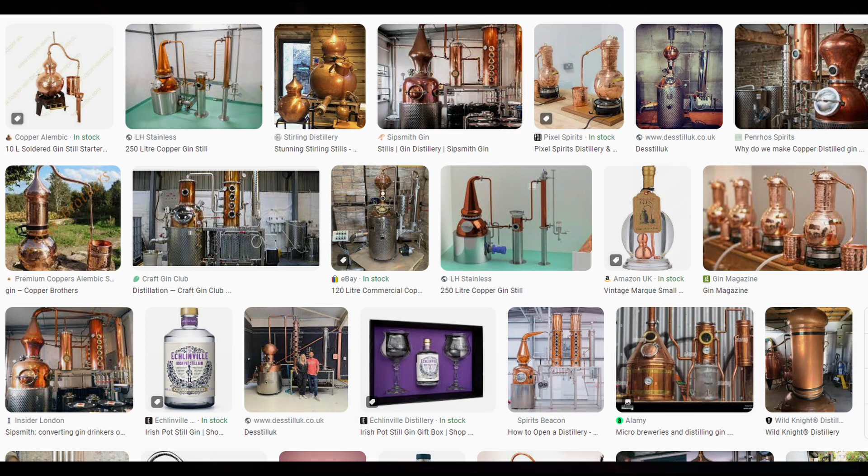So the starting point for me is an online search to find something that is a really nice shape and something that I think I can make on the machine. The critical factor here is the size of what you can fit into the rotary axis. Based on some mistakes I've made earlier, where I've made pieces that are too big, I'm going to stick to a 250mm, roughly 10-inch diameter for this.

So this is quite a short, dumpy kind of shape. I want to hopefully try and go for an 18-inch high, 450mm high lamp base here. We'll see how we go with the shape. We may need to elongate it a little bit, but the first step for me now, once I've got the image and decided that this is what I want to make...

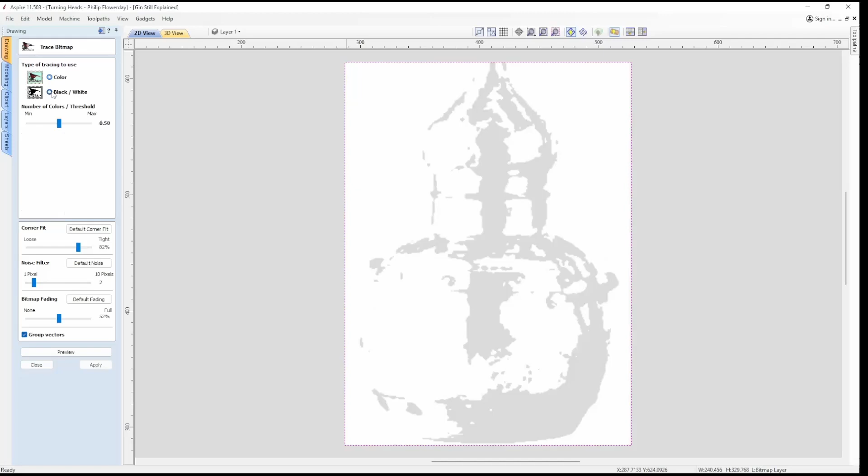is to trace a vector around the outside of the image. Now Aspire has some tools for tracing around bitmap images, and I'll show you there's an option to pick colours, and it's very good, but I don't want to do this. I just want an outline of this image that I'm going to wrap around an axis and produce a rotary job for the CNC machine to cut.

So I'm not going to go straight from Aspire to Mach 4 and the machine. What I want to do here is see what the most efficient use of the material is. I'm going to be using 18mm birch ply for this, and I don't think I need to have pieces that are 18 inches high all the way across here. I think it'd be very wasteful.

The other thing I want to try and do with this piece is to have 4 faces on it. You'll see on the oval lamp base video that there are 4 faces, and the way to do that is to have cross pieces. So you're layering up on 4 sides all at the same time, building from the center outwards. I can't think of any way of doing that in Aspire, so I'm going to use Blender.

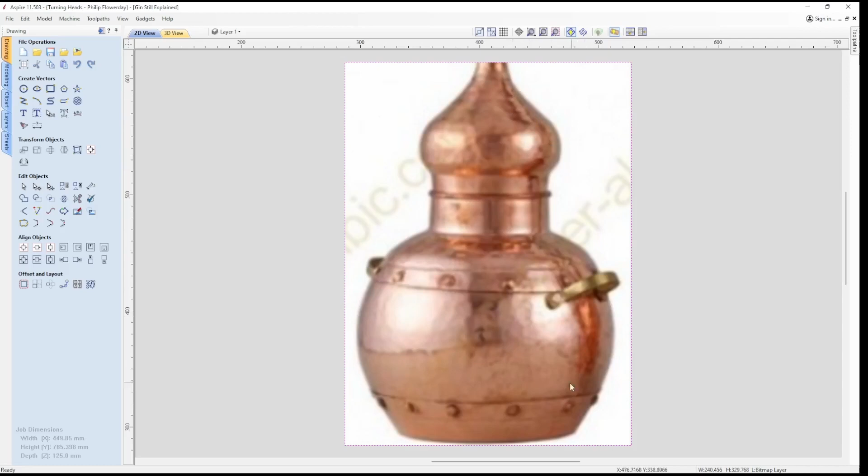So this is a vector I've traced round the bitmap image. Very easy to do with a combination of straight lines, circles which you can cut using node editing, and the curve tool. So it's interesting to do this.

You also have to bear in mind perspective, because this is not a head-on photograph of the still. So I'm taking a horizontal line from the base here in this corner and extrapolating that across. So this is all I need for a rotary job and a spar to be able to wrap this between the rails on each side. So I'll show you that on the job.

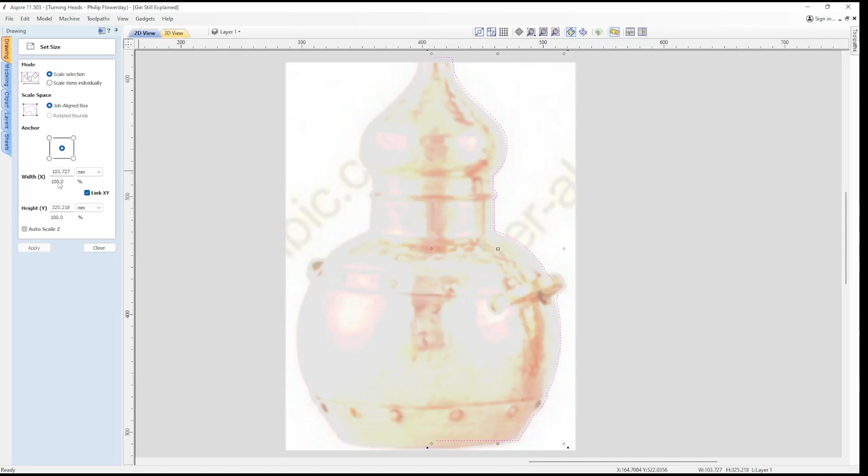What I'm aiming for here, as I said, is a 250mm diameter. So I'm going to try and manipulate this vector so that it's 125mm across as a radius. So I can go into my sizing tool and we can see here that it's 103mm, so I just need to make that 125, and then we'll see where we are height wise. So we're getting close to the 450 that I want, so we'll maybe be able to stretch that a little bit and it'll not take away from the shape.

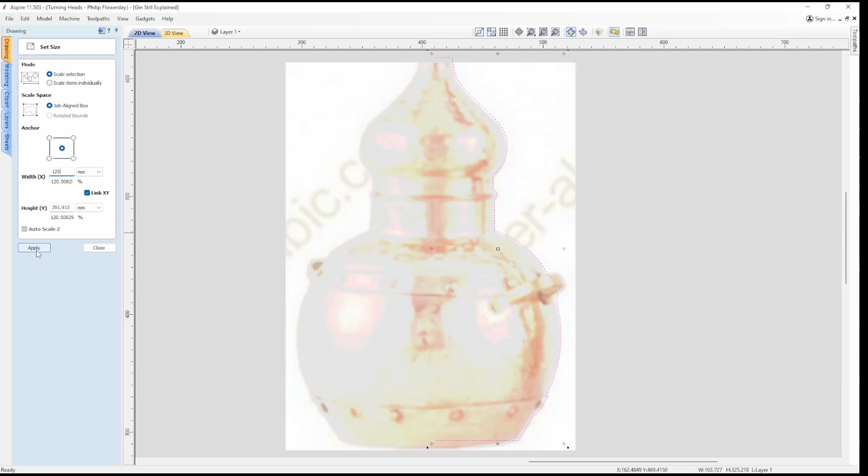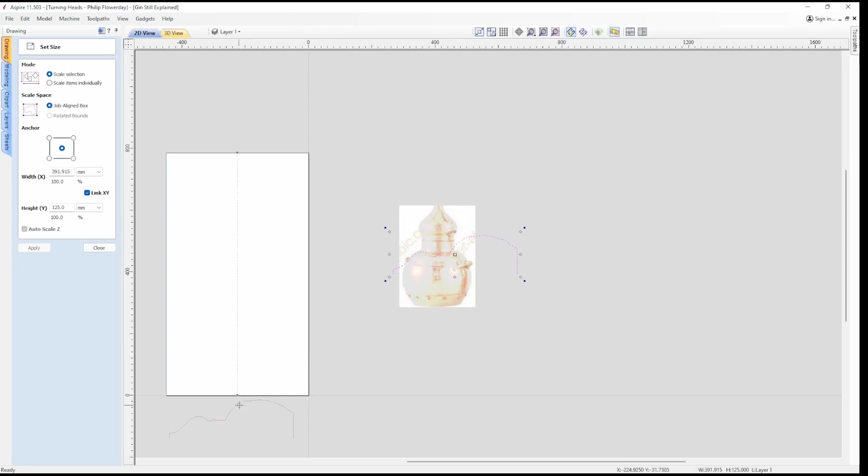So this is now a vector which I will use for wrapping. So I'll just rotate that around, and then bring that into my job. I'll just, for simplicity, it's easier just to have it here below the workpiece. This is my workpiece.

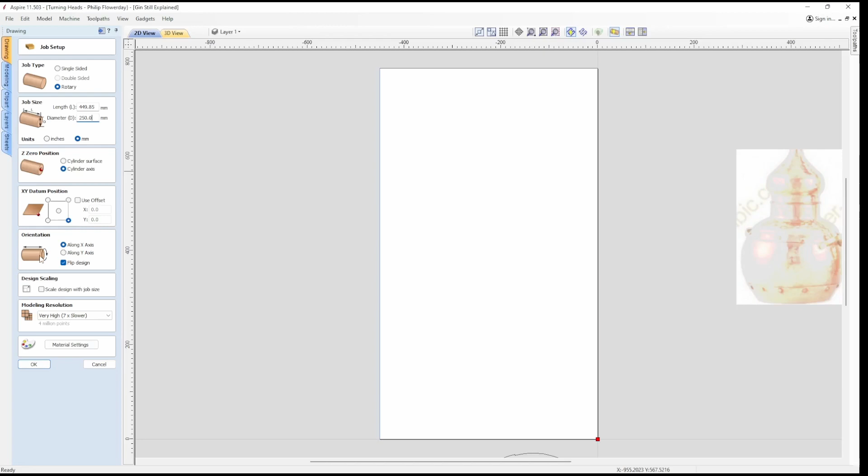And just to show you the job settings, we have a rotary job. We're going for a piece of stock which is 450mm long and this 250mm diameter. My 0 position is the axis for rotary jobs, and my rotary axis is positioned at the back of my machine, so I work from the right hand side to left, and I'm going along the x-axis. So we'll just OK that.

So this is my vector, and I'm going to make that 450mm long. So I want to disconnect the XY and just make that 450, because I don't want that 125 to get any bigger.

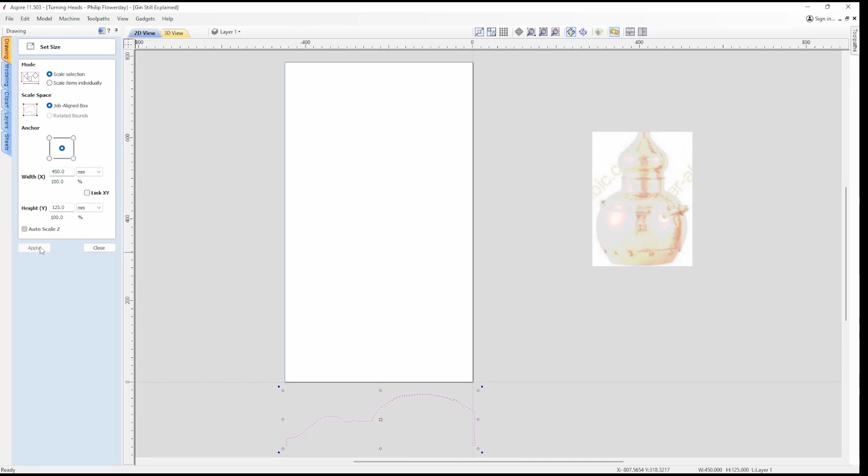So we've now got our final vector that we're going to use for our rotary job. So all I need to do is select these rails that Aspire creates automatically for you on a rotary job, and go into our sweep tool, use those selected rails, then pick the vector and apply that.

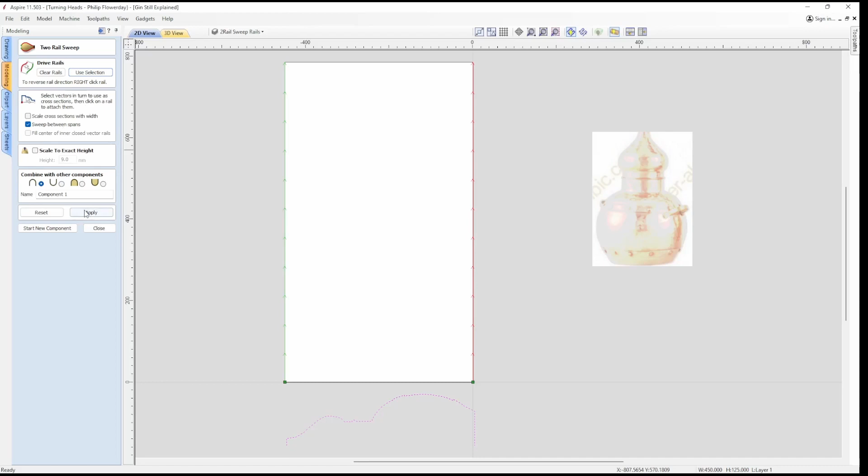So we'll go into 3D view and have a look at this. Okay, that's pretty good. So it's starting to take shape. That's exactly what I want.

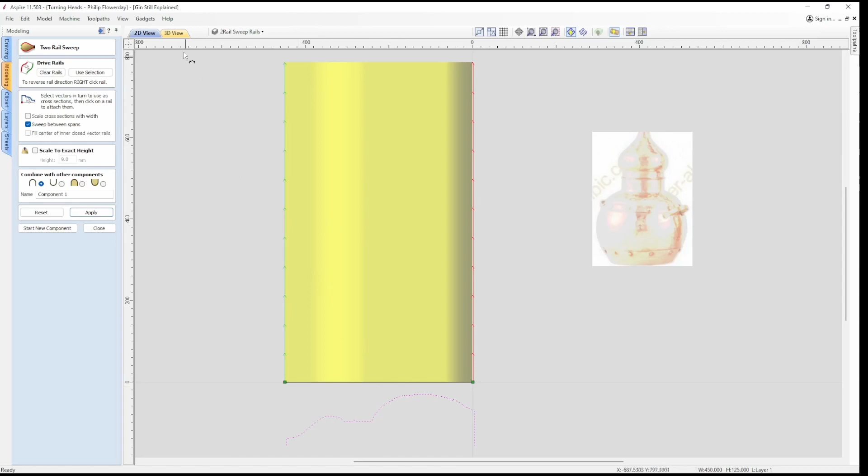So what am I going to do next? I'm going to create the studs that go around these straps, and then I'm going to put on some hammer finish. Now I think I'll just concentrate on this area. So I'll do that off camera and then come back when I've done those models.

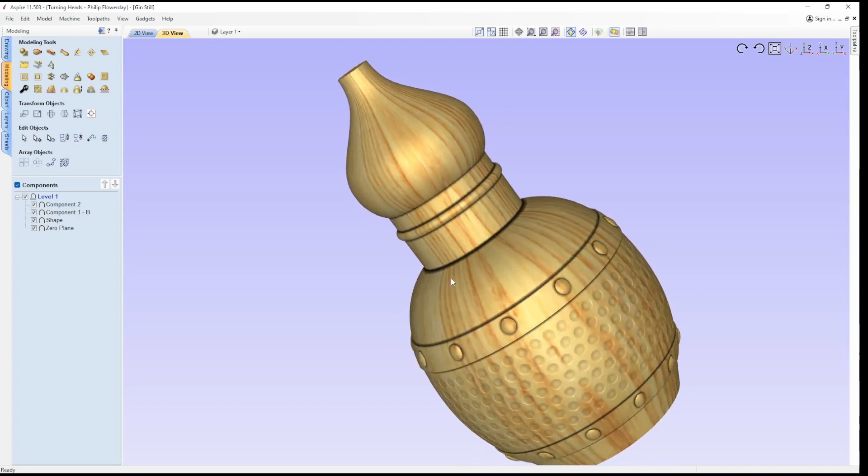So this is what it looks like now with the studs on the straps and the hammer finish. So I don't think I want to add anything more to this. It's just going to overcomplicate it.

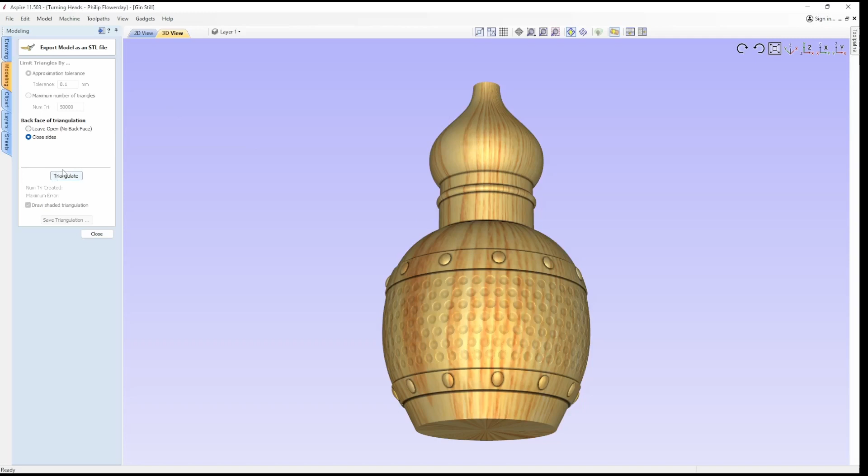Now we have our 3D model ready to export from Aspire, so that we can open it up in Blender and do our slicing. So I'm just going to very quickly do an STL export, and save that.

And the next step is we'll open it up in Blender.

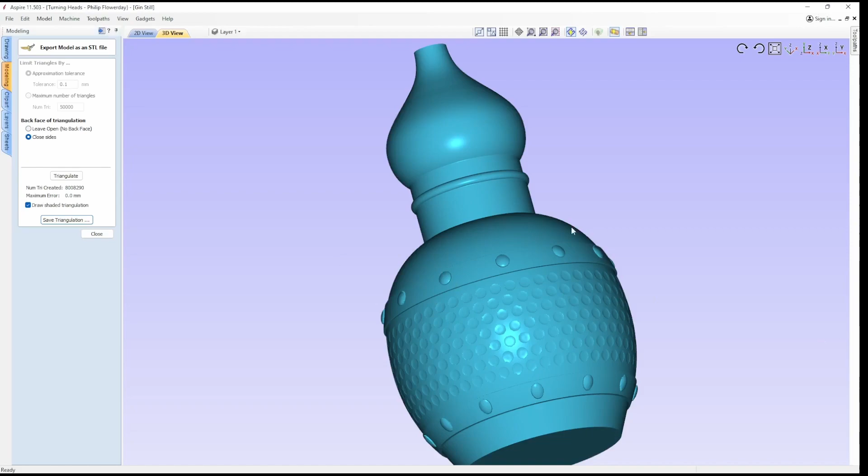Okay, so after importing it into Blender, I want to create my slices. So I'll create cubes which are 18 millimeters wide. Now the units in Blender are in meters, and I don't change them because I don't need to, as this allows me to bring this into Blender and back into Aspire again, and it keeps the units in millimeters in Aspire. So I create all these cubes which are layers of plywood and build them out from the center, and then I use a modifier in Blender to convert those cubes into the slices where there's an intersection of the gin still and the sheet.

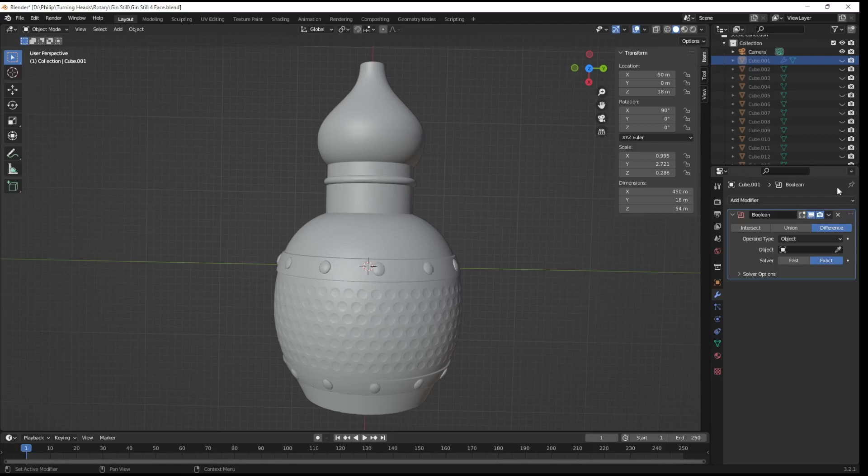So it probably sounds overcomplicated, but when you do it, it's not. So I'll just go in here and do a boolean and an intersect, and I've gone ahead and done this so just to keep this video as short as possible. So I'm just going to unhide all of these cubes that I've created, and you'll be able to see, hopefully, and maybe if I rotate this a little bit, you'll be able to see all of these slices that have been created.

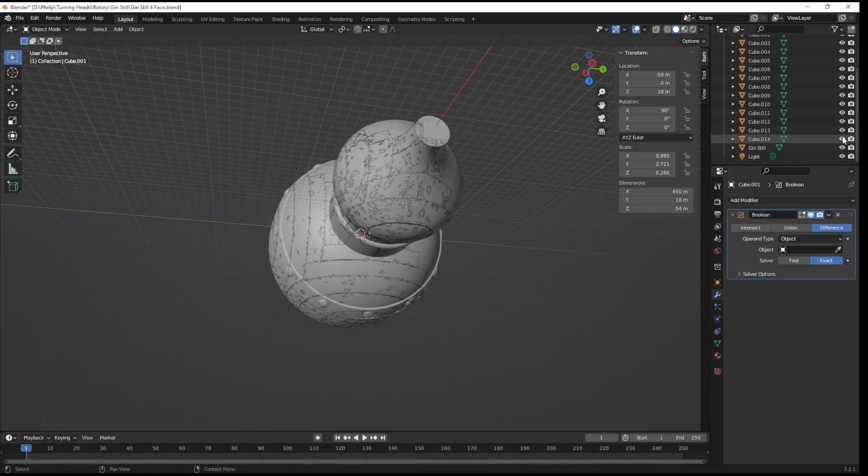I will ultimately hide and delete the gin still, but now we can see these slices, and I get a face here and a face here. I don't need to go all the way around because I'm just going to duplicate each of these slices when I go back into Aspire.

So what I'll do now, in order to get this ready to go back into Aspire, I will line all of these up on the same plane so that they will be on a sheet in Aspire, all in the same plane, which will be a sheet of 18mm ply in Aspire. So we'll show you that next.

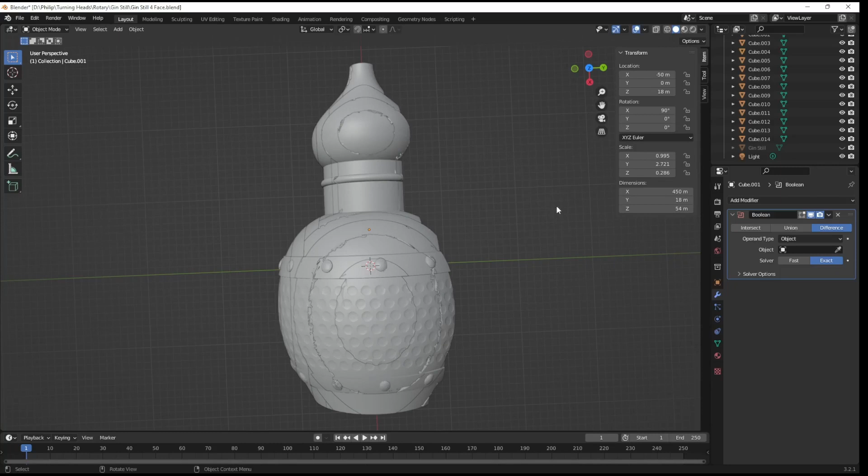Here's all my slices. Now what I can do is just take a cutting list from the dimensions of each of these pieces in Blender, take that out to the workshop, go and search for some of the pieces that may be offcuts from other projects, and cut the rest.

So I'll always just leave some tolerance just to give me a margin of error on each of these pieces. But you can see that I don't need a whole bunch of 450mm by 250mm pieces, which you would do if you hadn't used Blender, and that would be such a waste.

So this gives me the opportunity to use some of the pieces that are offcuts, and it speeds the job up as well, because I don't need to run a rounding path for the whole length of the piece, and I can just go straight in with roughing of the 3D model in Mach 4.

So we can stop here and create a cutting list and start laying the pieces out. So the difficulty is making sure that you've got all the pieces in the right order, and you know which piece is for a front and back and which piece is for a side.

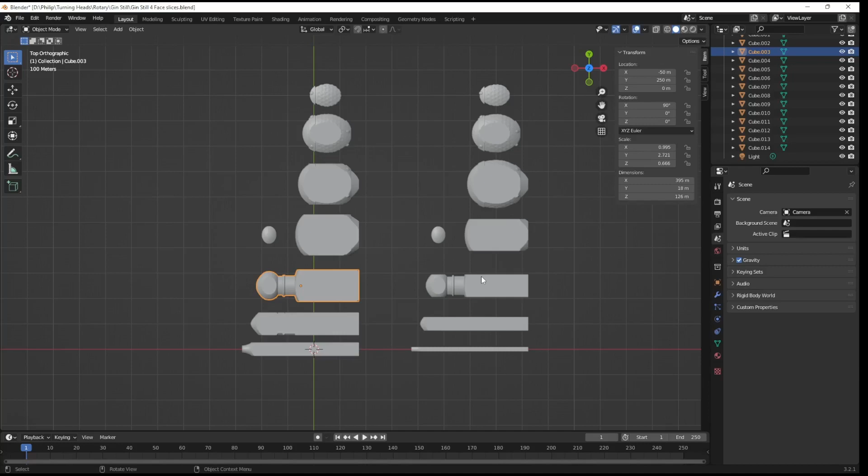I have brought this into Aspire to give me a cutting list, but you don't really need to. So next step, cutting the pieces out and doing a glue up.

Having cut all the pieces out, this is where it can get complicated. I lay them out on the table and keep all of the north-south separate from the east-west facing pieces. Label them all separately, starting with the innermost pieces working outwards.

So it turns out that even though I measured all of this out, and I know I can fit 250mm into my rotary axis, and I measured everything on Aspire and Blender to fit within 250 mils, the sides are all 250 mils, but obviously, stupid me, the diagonals are going to be more than 250 mils.

So to fix this, I'm going to cut two 250 mil circles on the CNC, put one at the bottom, one on the top, and whatever doesn't fit into that cylinder is going to get cut off on the bandsaw. So let's do it.

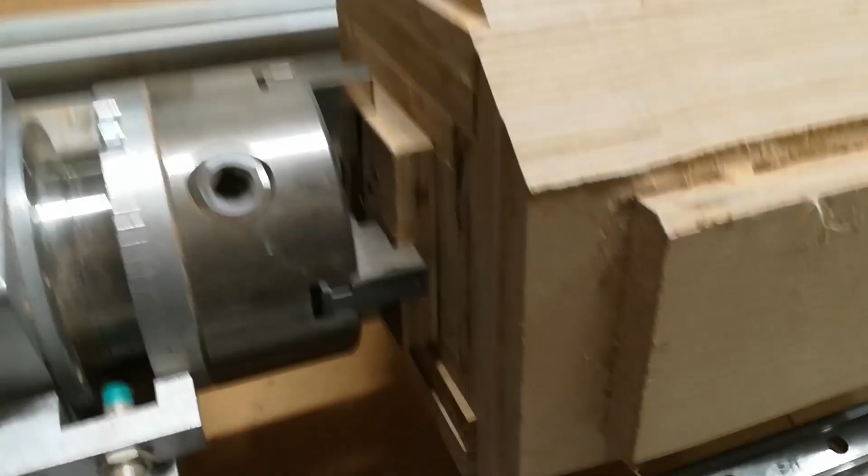Okay, so job for the bandsaw. That's it, cut on the bandsaw, and just doing a test here just to make sure that it fits and that it rotates freely. So with the machine switched off, I can just rotate this by hand, and it seems to be okay.

We're clearing the sides fine. So I'll go ahead and do a quick rounding path on it before I start the rough cut and then the finish.

So relieved to have that cut and fitting in now. Will not make that mistake again. Good to have the bandsaw to be able to get that cut down. So let's go.

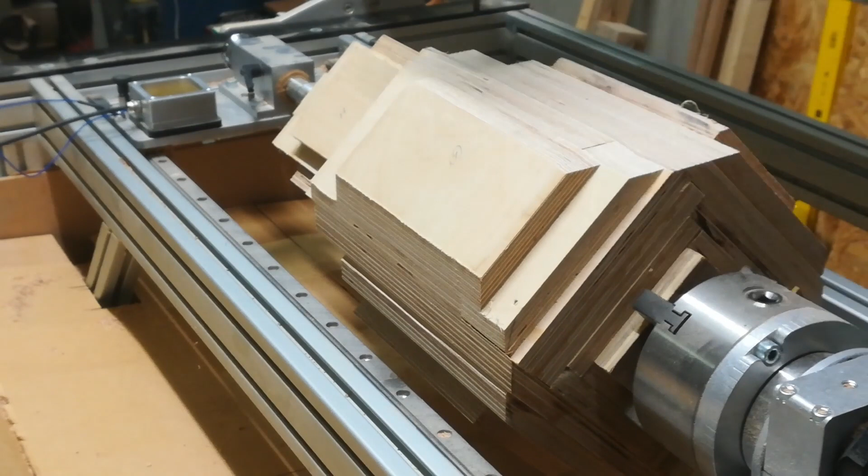So as you saw there, that toolpath is a little bit aggressive and the bit started to wander. So I'm going to up the RPM and slow the feed rate down and give it another go.

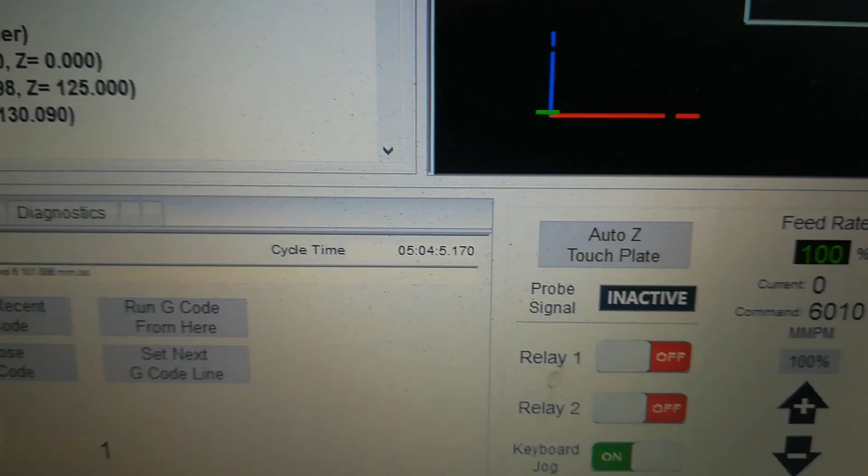Okay, that's the roughing pass done eventually. So we're looking at, if I can focus that, 5 hours on the clock. So it's really good to get that done.

So what are we left with? Well, you could say this is the Minecraft version. So it does look a bit blocky at this stage.

Now there are a couple of things just to point out here. I put an arrow on the bottom here so that I would know where my A0 was on the rotary axis. So as time progressed with the first few cuts, I noticed that this was going out of step. Now I don't think there's any issue in the machine. I just don't think that's the case. I think it's just because it's birch plywood that it's so hard that it's actually dragging the piece in with the bit, so it's incrementally, and you wouldn't notice it on each pass, incrementally building up a slight discrepancy in the angle.

So it meant that whenever I stopped and restarted a couple of times and reset the A to 0, then it was cutting at a slightly different position than it was before, which wouldn't matter for pure cylindrical parts of the lamp base, but for where I'm trying to put details in, there are some issues potentially ahead with the finish pass. So I think these are supposed to all line up with each other, and you can tell because of the lines on the birch that it's not quite lining up. So I think we might have some issues here.

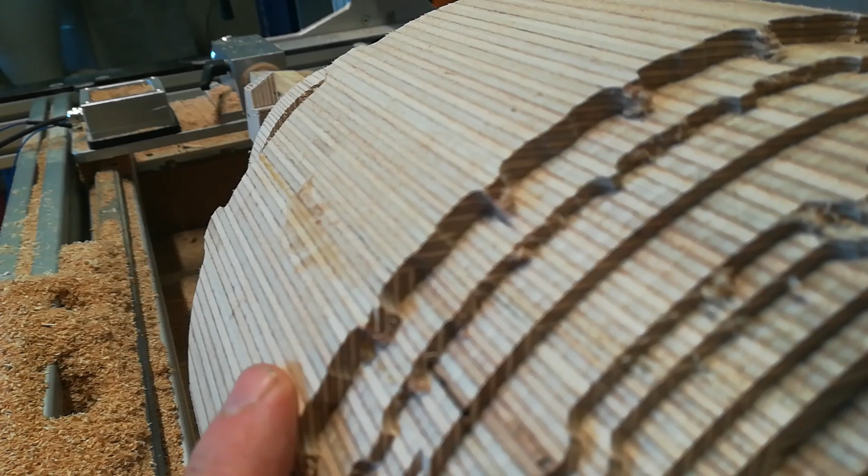So other than that, and you saw that every so often I had to cut a little bit off here, otherwise the collet would have hit the side. Don't really want that to happen, so that just required a little bit of management. But I was watching this like a hawk for the last hour, just to make sure that this all ran smoothly.

That's actually hollow in the middle in there, so I need to put a plug in once this is cut, because the plug is at the end there. But whenever I was cutting these, I left them about 100-120 mil longer than they needed to be, just to give me some room to play with.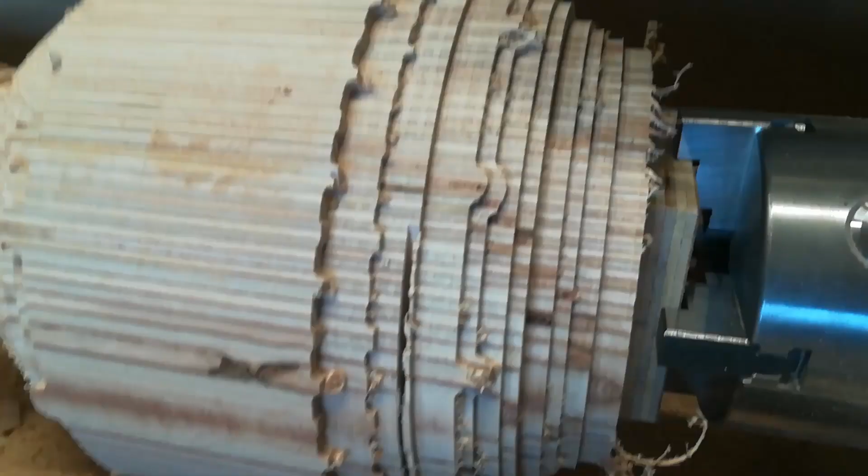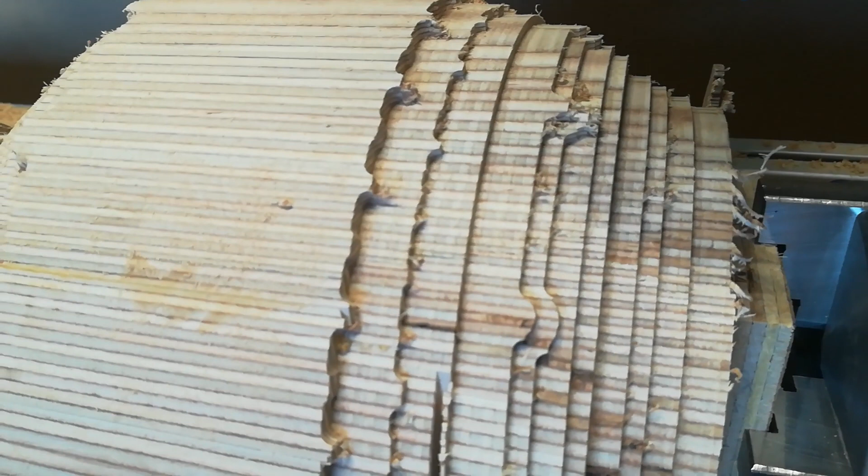And you can see the offset there because of the dragging issue with the bit. Now the way around that, I think, is just to change the tool path so that we're not going on a raster pattern at 90 degrees to the axis, that we're maybe going with the axis, so that we're giving, I think we're giving the bit too much work to do based on the strength of this material. We were going down 3.3 millimeters in each pass. The spindle speed I increased to 11,000. So I think we've done everything we can to ensure that we've got good cuts on the birch plywood.

So it'll be down to the tool path. So the next time I make one of these, I'll change the toolpath. It just doesn't make for such a good video because you don't see it being built up from right to left. But I want to get a good end result at the end of the day. The video has to be secondary.

So let's take a break. I'll do a bit change, reset the Z height, and we'll go for the finish pass. So let's just see how this transforms now. I think it's going to be beautiful.

Okay, I think it's time for a rethink. The hammer finish isn't working out at all, because of the dragging, and I'm having to every so often reset the A0 on the rotary axis. The hammer finish isn't producing circles, so there isn't really any point in having what should be a hammer finish on the lamp base that doesn't look like hammer finish.

So what I'll do is wait for it to finish this high section in the middle here that it's currently cutting out, to bring us back down to what should have been the finished dimensions of the roughing pass. We'll get that finished and out of the way. I'll go back into Aspire, remove the model for the hammer finish, and come out and recut that. Based on what's been happening this morning, I'll do two more passes: one at 1mm above final height, and then one final pass at final height. That should hopefully produce a good end result.

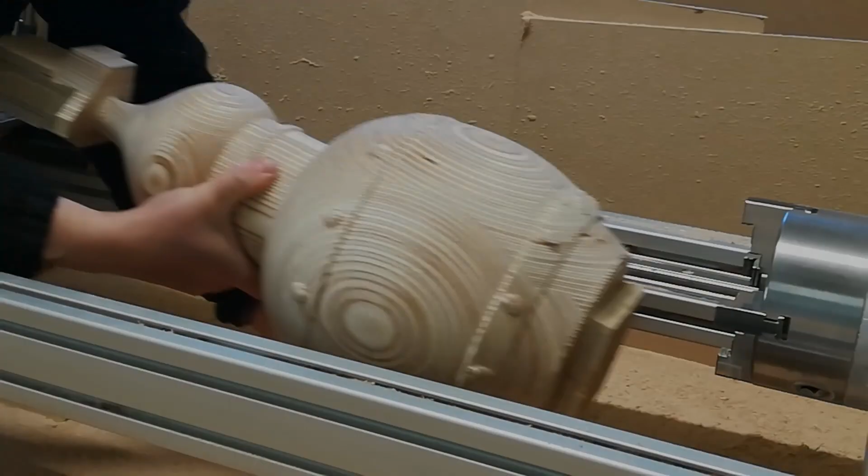So now that we're off the machine, what's left to do? Well, I've given it a very quick sand with some 120 grit just to take off some of the machining marks. The plug's in that's been setting overnight, I'll cut it, drill a 10mm hole top and bottom to bring the cable through.

Then I'll fit the bulb holder, and then make a stand. These stills generally sit on stands, so let's make a stand for this. It'll sit another couple of inches taller and allow the cable to exit the bottom of the lamp base. So let's get going.

How did the lamp turn out?